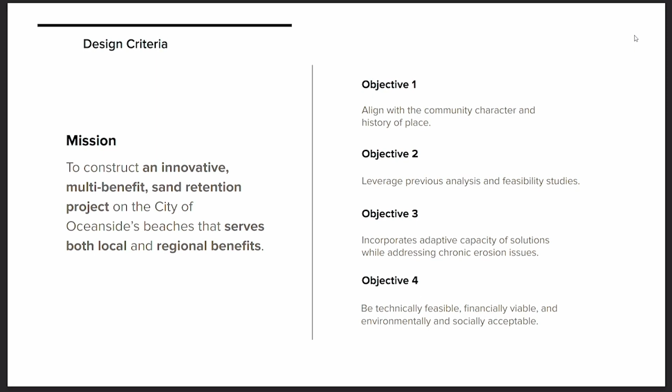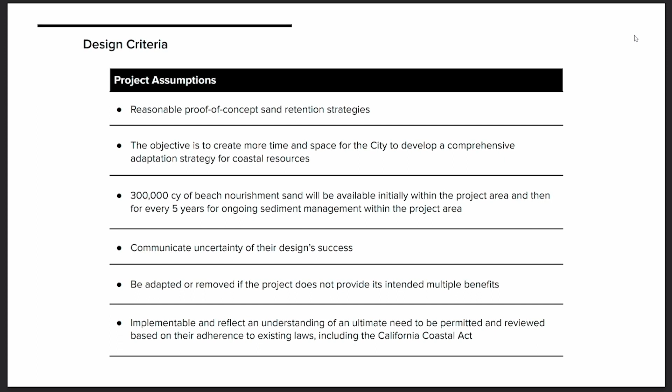Our criteria are all published online as well, so if I'm referencing it here quickly, we'll publish these slides and also have the design brief published with all of this information. It's based around physical, financial, environmental, social, and regional goals. We also have a set of key project assumptions, like how much sediment we're imagining would nourish the types of projects we're seeing today, and uncertainty in design success, et cetera. All of the teams presenting will speak to different performance goals, costing, as well as share with you what their concept might bring to this community.

So that's kind of where we're headed, and we have a couple minutes to go. What we wanted to do is set up—today our first team is Deltares and MVRDV. We're so fortunate to have them joining us from the Netherlands, and they're going to share with you today an update to their concept. They'll have about 20 minutes to present. So as you're listening, again, you can be writing questions—you can submit your questions online.

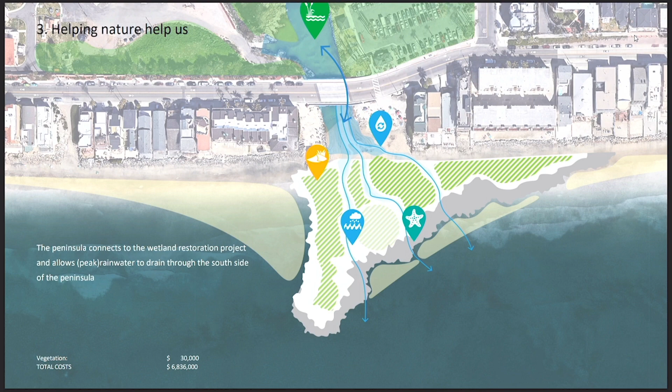As we move on, after this initial stage, a fill of sand will take place, 200,000 cubic yards half a mile north of the peninsula, and 100,000 cubic yards half a mile south. This type of sand fill is needed to create enough sand volume in order to have a base for our beach. The peninsula connects to the backshore wetland and becomes an extension of it, with a creek mouth opening towards the ocean. A vegetation layer will be added on top of the core of the peninsula, and that will raise the cost by about $30,000.

Functionally, how the peninsula works, it slows down the mobility of the sand from north to south and from south to north, retaining and nourishing the beach south and north of the peninsula without obstructing overall movement of sand. That creates a new beach with a width ranging from 100 feet at the widest part to 50 feet at the narrowest part.

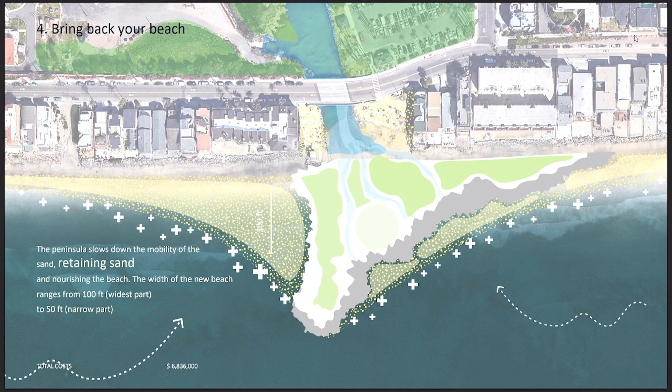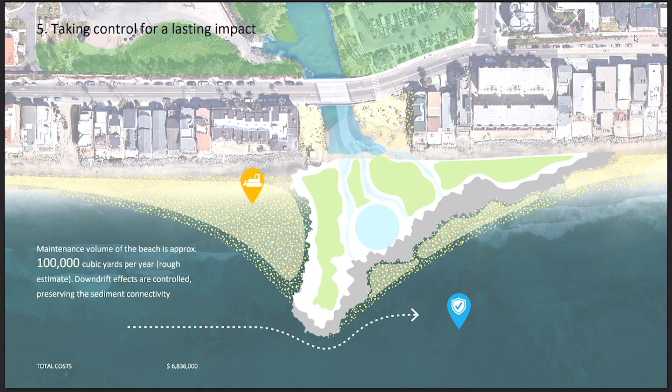For a lasting impact of this beach and the measure, there is the need for nourishment. Approximately, we will need 100,000 cubic yards per year. This is kind of a rough estimate, and the exact amount of infill needed should be studied further in the future. The downdrift effects are controlled, and the sediment connectivity is preserved with this peninsula.

The peninsula is publicly accessible, makes the sandy beach publicly accessible for bathing and the surfing point, assists the watershed through flood control enhancement, and creates an area of nature exploration.

In this stage of constructing the peninsula, we are adding another layer of activities, for example, a tidal pool, a set of elevated pathways, and other public amenities that will raise the cost for the creation of this peninsula to $8.5 million. We're also adding a boardwalk connecting the north and south of Oceanside.

And on the next phase, we see how we create these different habitats. So by making this extension of the wetlands, we create in total 5 new habitats. We have the sandy beach, of course, the sandy dune habitat, the coastal wetland, the intertidal habitat, and the subtidal habitat.

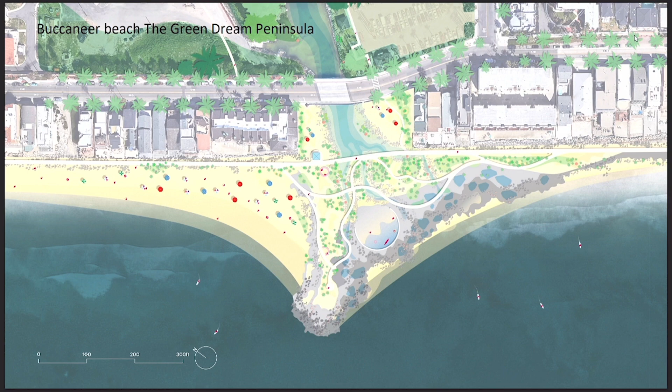So here you see a plan view of our proposal. You see how our proposal is connecting with the Buccaneer Wetland Restoration Project and becomes a place with the community. We create a wide, safe, and sandy beach. We create intertidal wetland. We have the tidal pool.

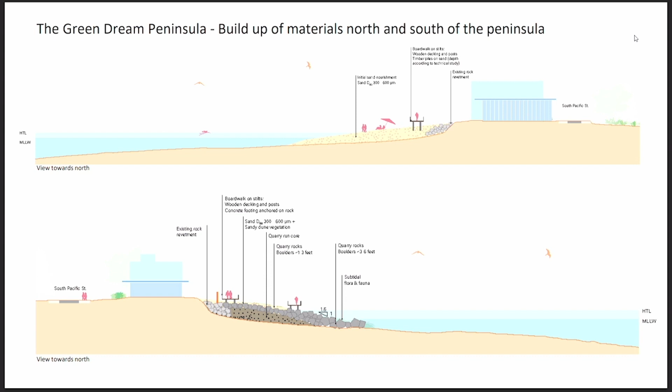How the structure is made. The structure is quite straightforward, let's say. Here in these sections, we have a core of bigger and smaller quarry rocks and boulders with a spine of quarry run on top that helps to grip the sand and restore the new beach.

This is a view of one of the elevated pathways towards the pier. We have enough space on the beach, we have an entrance, and we make sure that the surfing conditions are preserved on this side.

As a next step, we wanted to take a better look at the environmental feasibility and what type of habitats we can imagine here. In order to do that, we have consultation with local experts. We have a project team with specialists on species and what type of habitats we want to create. And that's how we created the 5 different habitats that I mentioned earlier.

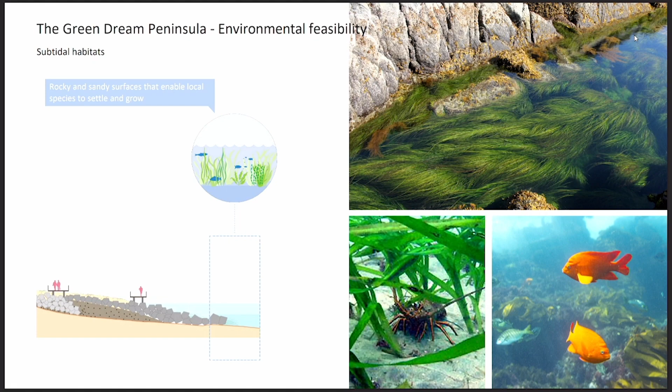And I'm going to take you a bit through how we imagine this and how this could be realized in Buccaneer Peninsula. The first one is the subtidal habitat. It's really at the edge and it's mostly underwater, as the name says, and it's mostly rocky and sandy surfaces that can enable local species to settle and grow, like, for example, the surf grass that we see here. This is very important because biodiversity loss can be reversed through this type of project with habitat restoration.

The next habitat, as we go more towards the land, is the intertidal habitat. It's a rocky habitat that enables preservation of species, and it has been seen in the context of Southern California a lot, like you see here, an example from the La Jolla intertidal habitat. And also here we see that it can create opportunity for these tidal pools, like the example of Laguna Beach, and we can imagine it being here on our site, open for more human activities.

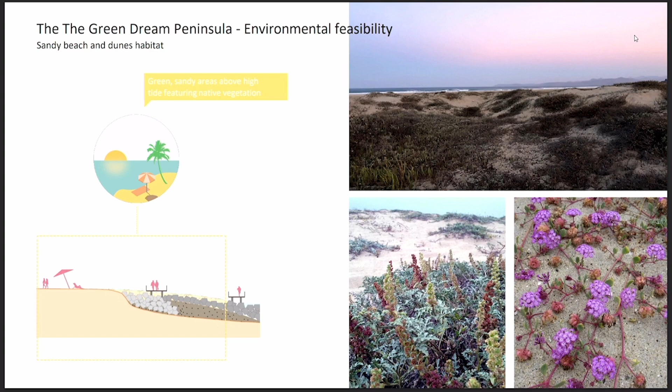Then we have the sandy beach and dune habitat, which is also part of the more inward part of the peninsula, and we can have species like coastal sage scrub on that. Dunes in general are a nature-based solution to enhance resilience, and they can be part of the new beach of Oceanside.

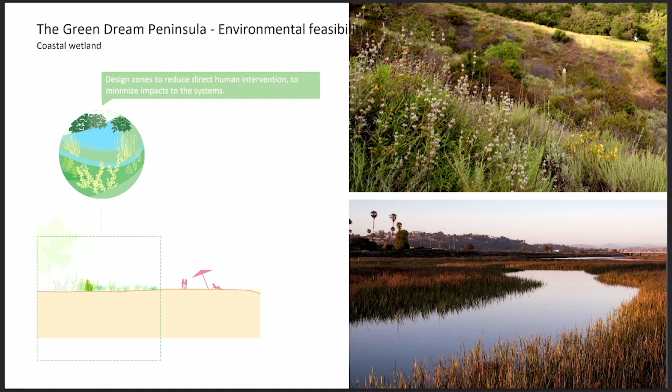The last habitat is the coastal wetland. It's a zone designed to reduce direct human intervention and to minimize the effects that human intervention can have on the system. Wetland restoration can help with extreme climate events, so it can help with flooding, and it can ensure that the beach will stay there for a longer period of time.

Overall, that's the design of the Sandcatcher. It's a collection of multiple benefits. And the Green Dream Peninsula is a dynamic space that creates a new beach that benefits community and nature. Now Volker will explain the future possibilities.

Thank you. Yeah, so welcome again to the future of Oceanside. While the future of the Rebeach, as we just explained, is actually very near, let's open up another window of opportunities. Well, Oceanside is one of the pearls of the Californian coastline, and each pearl has its own identity.

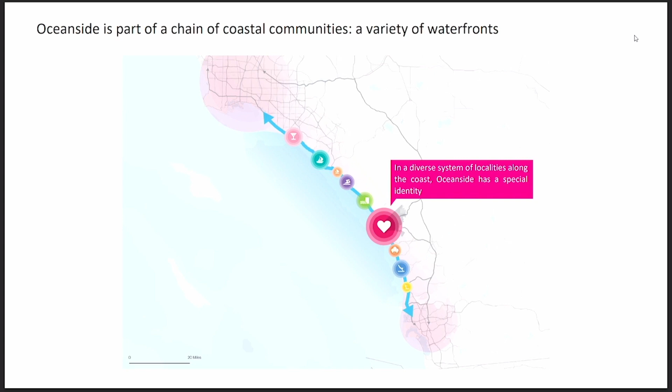So how to add to that variety and how to stand out and really make a difference, make people want to go to Oceanside. And even within Oceanside, we see a chain of diversities, a chain with new destinations by adding program in addition to the pier that's of course already here.

And restoring the connection over the full stretch of the coastline along the way, making a unity of Oceanside again, making the sea accessible again.

And although it's not a must, we proposed a pilot project to be at the Buccaneer Street. It seems the most in need, not having any beach anymore for so many years.

So as we studied before, we can also imagine another peninsula at the Wisconsin Street. And even more can start, as you see the dashed line. They can start growing and lining up between the pier and the lagoon.

With a minimum maintenance and a high level of adjustment, either smaller or larger, it's easy to copy, it's easy to phase over time. And within the current budget, we actually find that all these interventions can either start over time or maybe even at the same time.

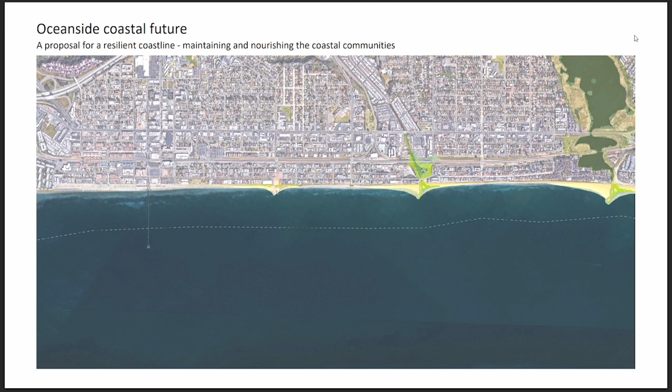All 3 peninsulas can be realized at low cost intervention. And we can see each new leisure paradise growing from there. Each with their own identity and each with their characteristic features, some planned, some unforeseen.

So, but before starting to transform the entire coastline of California, maybe we just start very small and where it's needed most, as said, the Buccaneer Street.

But why call it a green dream, as we say? Well, the peninsula part, I think, is pretty obvious by now. But the green dream, why? For one, because it's not only green, it's actually also very blue and, of course, mostly sandy.

And more important, it's really not a dream. It's something that we can really get very soon. It's plain simple. It's a proven method, and it's within budget.

And we do small interventions with the least impact on the current situation, with a large impact on nature and sea life, with the least effect on the waves, the iconic waves, of course. And it simply retains the sand for you.

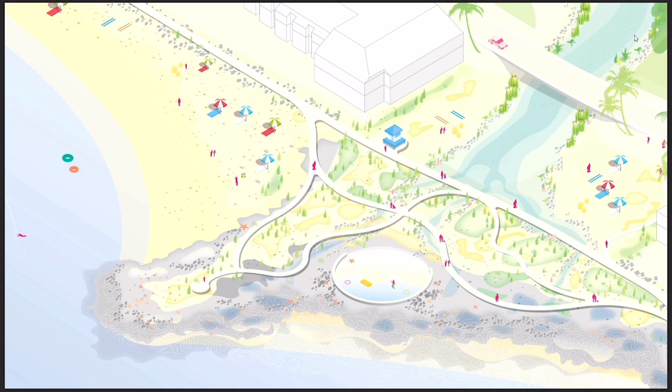It has one more on nature focused, the other one more on leisure, but they will all have sand. Nice sandy beaches as you knew them before.

So this is our proposal. The real work really only starts now. And we can't wait to start creating the future of Oceanside here with you and for you. Thank you very much.

I know you guys are probably more than familiar with what's going on here already, but just to reiterate, there's a couple of existing problems here. We're really trying to get access to safe and usable beaches, and there's two scenarios happening here at Oceanside. One where there's literally no beach, which is not good for access and is not safe. But then there's also the other, which is a limited accessible beach with the cobble.

Here's an image of the famous cobble wobble, which I thought was quite a cute little term. But actually having cobble on the beach can also disrupt the downdrift impacts too. If the sand is moving all the way down the beach and you've got cobble, there's no sand to move downdrift, so the downdrift beach can actually get a double whammy. So we want to get back that sandy beach, which is also good for people and for the Grunion.

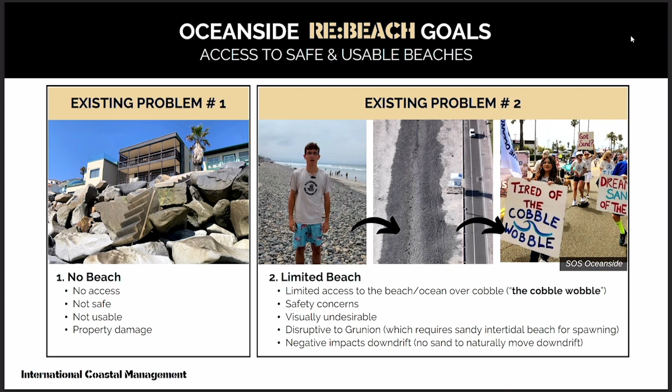So what is a healthy beach profile? You get these two bumps, one bump at the top of the beach and another bump at the bottom of the beach. The top bump is the sand dune and the bottom bump is a sandbar. So what we really want to do is recreate the sand dune and the sandbar, but then we also need to retain and manage those for an extended period of time, and that's when you get your real re-beach benefit.

Around the 70s, something started to change. The conditions changed, both man-made influences and natural conditions changing. And we were actually left with this long rock wall sort of step. The Gold Coast is 20 miles long, so we had basically the road level down to this rocky step down to the beach.

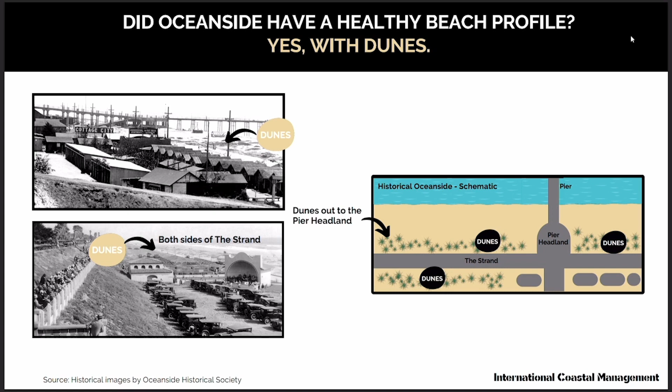So here's a schematic. You can see there was actually dunes on both sides of the strand, right up into this little pier headland, sort of abutment under the pier back in the day.

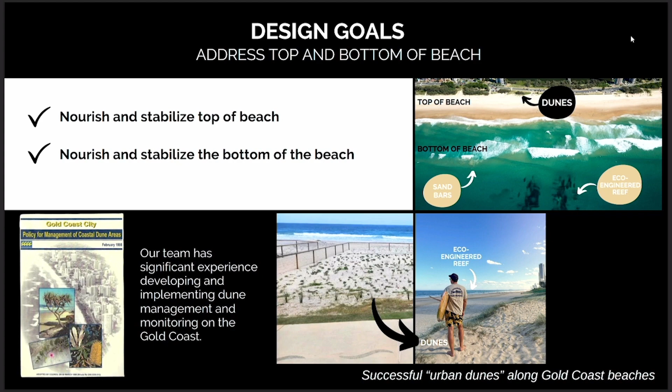So yes, the sand dunes - basically our founder Angus Jackson also wrote the book on dune management for the Gold Coast in Australia, which is still implemented today. So yeah, it's not just me up here talking, even though you guys have probably seen me a few times and you might be getting sick of me.

But there's actually a whole team behind us in Australia. We have our founder, Angus Jackson, who actually had a similar role to Jamie here at Oceanside about 40 years ago on the Gold Coast, and he was the one that implemented these pilot projects. He came to Oceanside in 1983 and talked to the US Army Corps of Engineers, looking at the bypassing tests that were going on - the pilot projects for the bypassing system - and took that back to Australia. We implemented the bypassing system on the Gold Coast, which has been running successfully now for the last few decades.

And we actually implemented two. So apart from that, after 40 years we're basically bringing this sort of technology and information back to you guys to keep the momentum going.

We also have Bobby Corbett - she won an Engineers Australia Award for Women in Coastal Engineering and Geoscience this year for her work on artificial reefs. We've got Sam King, who's actually joined me, sitting down the front. He won an Engineers Australia Award for his nature-based solutions project in Australia. He's going to be featured in this upcoming US Army Corps of Engineers Engineering with Nature book that's going to be published this year.

And then we also have Roger Tomlinson, who's the head of Griffith University's Coastal Management Program, and some great world leaders in the field on this team. Darryl Strauss, Dr. Darryl Strauss, one of the best coastal modelers in the world. And we also have Dr. Rod Connolly, a foremost marine biologist. So we've got quite the Rebeach team here behind us.

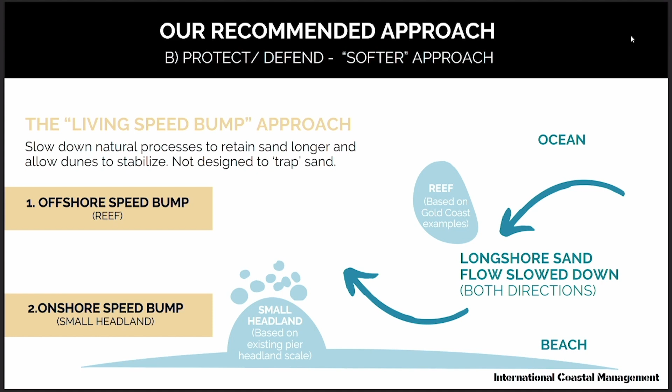We want to do a bit of a softer approach, so we're looking at doing a smaller structure and a submerged reef. We want to slow down the sand movement, and we want to slow down that wave energy, not stop it offshore. That results in this kind of wonky looking thing that we're calling a living speed bump. Again, the whole idea is not to stop the natural process, it's really just to slow everything down. So we're still allowing for that longshore sand transport to move, but it's just slowing that process down with an onshore speed bump and an offshore speed bump.

So what does that actually look like? Here's just an example of what the onshore speed bump could look like. We've got a bit of a headland with a low permeable end on it. So how do we come up with this?

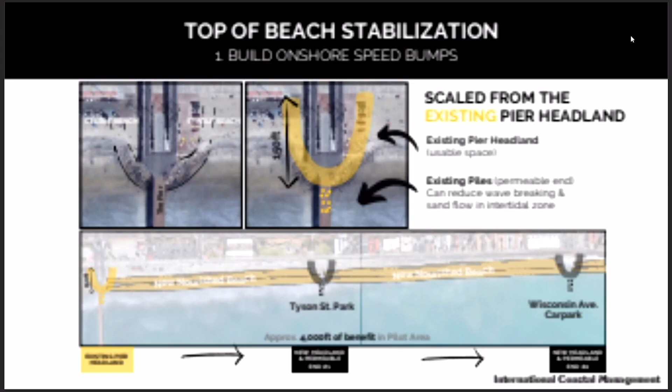Sometimes the best place to look is right on your own doorstep. So we looked at what's already here at Oceanside, what's kind of working. One of the things we noticed is under the pier there's a little headland sort of abutment, about 150 feet long. The jetty off the end adds this extra permeable section, and this 150 foot little headland is actually working pretty well to stabilize the top of the beach.

So what we wanted to do is basically recreate that, one up at Tyson Street Park, one at Wisconsin Avenue, just to stabilize that top of the beach. We're looking at about a 4,000 foot benefit area in this pilot zone.

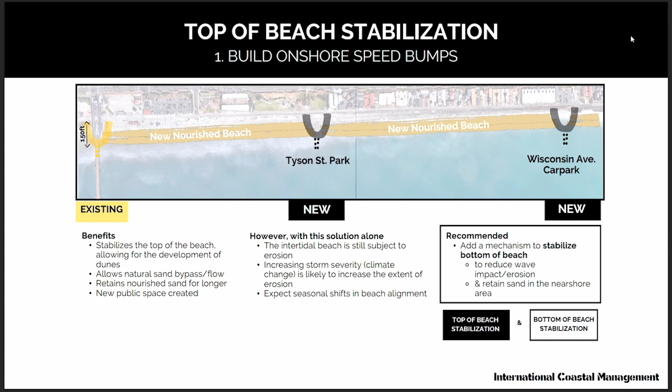Is stabilizing the top of the beach enough? We don't think so, going into increased climate change and storm severity. So we want to also stabilize the bottom of the beach. We know stabilizing the top is going to be beneficial just to get that dune stabilization and allow the dunes to grow, so we're actually going to add some bottom of the beach stabilization.

So what is that going to look like? There are two things: one is nearshore nourishment, which is essentially placing sand into the nearshore area, and then an eco-engineered reef. The nearshore nourishment and the eco-engineered reef work hand in hand to stabilize that bottom of the beach.

Nearshore nourishment is also a process that was developed on the Gold Coast. It's a really efficient and cost-effective way of putting sand back onto the profile to nourish the whole profile. Whenever you want to do a nourishment project and widen the beach, you can't just put sand on top - you need to widen that whole beach profile. That's where nearshore nourishment comes into place.

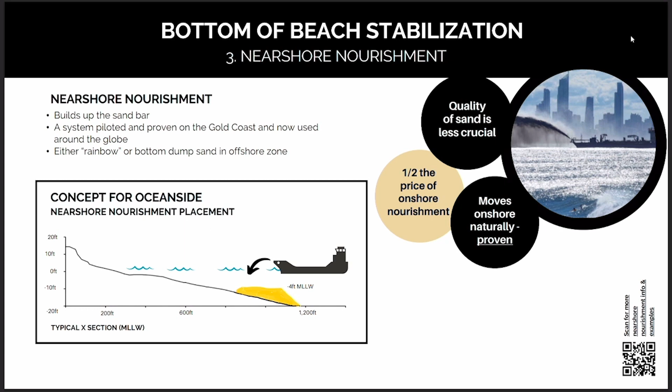It can either be done via rainbow, where you spray it out, or you can drive over and dump it at the bottom. This is a shot from the Gold Coast of placing nearshore nourishment in the surf zone, and it's really quite effective. Then in conjunction with the nearshore nourishment, we're looking at an eco-engineered reef.

We've done two considerations here for Oceanside based on the two reefs working on the Gold Coast. We have a sand-filled geocontainer reef, which is lower and wider, or a rock reef, which is smaller and higher. Both have their own positives and negatives, looking at safety, cost, constructability, longevity, removability, and environmental benefits.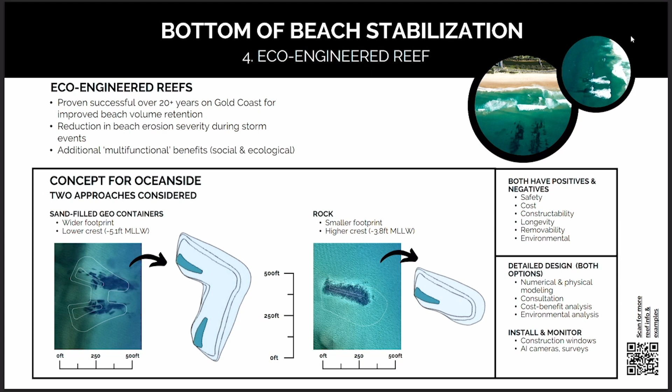Based on conversations from the first couple of Rebeach programs, we're using the footprint of the sand-filled geocontainers, because it's also a cost-effective way to do this in a pilot setting. If we go ahead with detailed design, we'd consider both and run them in parallel. In detailed design you do further numerical modeling, but also physical modeling, running waves in wave tanks over both. But based on our initial concept modeling, either footprint is going to work for Oceanside.

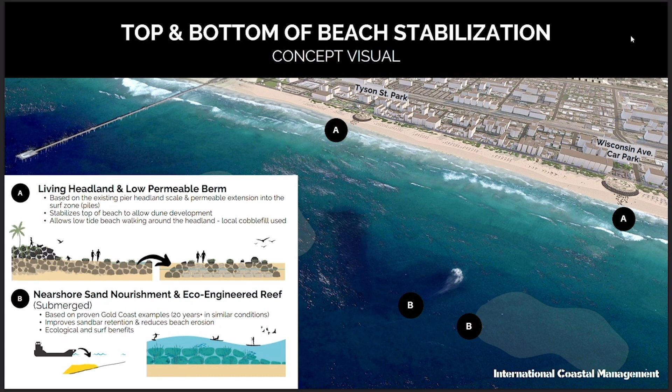When you put them all together, you get this top of the beach speed bump, which is the two headlands. Note that those little headlands are roughly the same scale as the one under the jetty pier. Then you've got an offshore reef and additional sand nourishment in that nearshore zone.

What are we really talking about here? Short headlands that come out onto the beach, some low permeable rocks into the surf zone, and submerged reefs - all of which already exist here in Southern California. We're just putting those together.

This is the concept, one of the concept locations here at Wisconsin Avenue Car Park. You get an idea of before and after - a nice, wide, sandy beach, a bit of dune up top, usable headland space. We didn't want to put too much on it at this point, just at a concept level - some dune vegetation, maybe a shower, maybe a bathroom, some designated dog areas, a playground, and you get this kind of usable space.

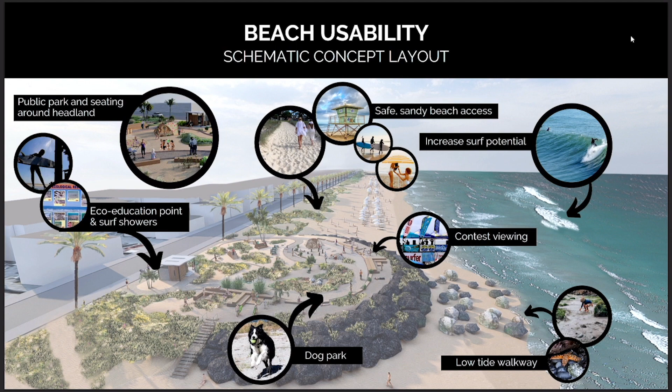Note again, the size of this headland is already what's existing under the pier. So you get this nice wide sandy beach, access points between the dunes, great for surf contest viewing up on the headland itself, and this nice intertidal walkway around - so you should be able to walk all the way along the beach at low tide.

And this is just to reiterate the sort of usability and the space. It's really going to be comparative to the headland that's under the pier as far as scale.

What we noticed being here on the beach and looking at historical imagery is that most people access from the road and go straight to this sort of umbrella zone. And there's this almost unused space at the top of the beach.

So what we're saying is turn this unused top-of-beach space into something green, while still keeping the access way to it so you can still go to your umbrella zone. The umbrella zone stays the same, your swimming area stays the same. But the added surf benefit is going to increase, and you're also going to get an offshore habitat as well.

Just reiterating that point again: you've got that nice dual space up on the top of the beach and on the headland itself, an intertidal habitat down in that permeable headland end, and the reef can really encourage some biodiversity as well. This is just an example coming off the Australian reef.

These large sand-filled containers are about 200 tons each. The type of material on the end and outside is kind of like Velcro for microbes floating around in the water, and they stick to it within a matter of hours, really attracting seaweed, kelp, and even soft corals, which you can see up on top.

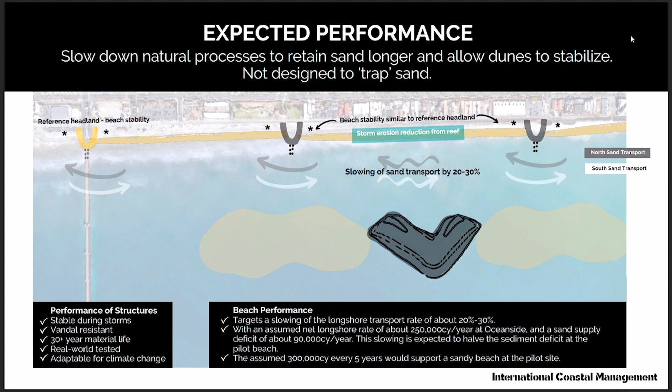This whole re-beach approach is about innovation, and we love to be innovative, but we also want to be risk-averse at the same time. So what are we doing about that?

We're basically leveraging the size and scale of something that's already working on site with this little headland speed bump, roughly the same scale. So we know that's going to hold the top of the beach. We know that the engineered reef off the bottom of the beach is going to stabilize the bottom of the beach. So you're getting top-of-beach and bottom-of-beach stabilization, and we know that's going to work.

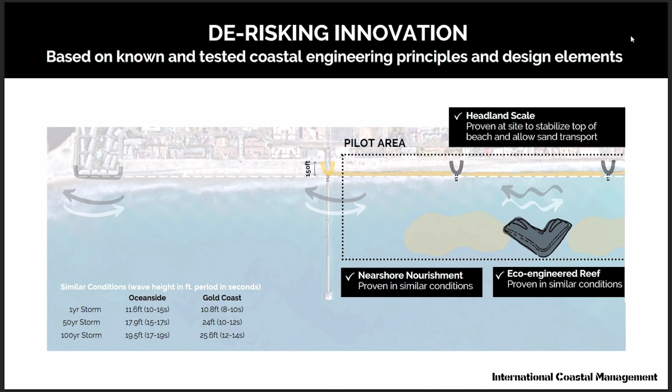And how much is this all going to cost? We're looking at around $31 million to get this 4,000 feet worth of beachfront. When you break down the costs, it's really an even split between the amount of sand that you put in, the headland, and the reef itself.

So as you scale this up down the beach, it would actually get cheaper as you went down, because you would only need one extra headland for every reef that you do. So you could actually do the whole of Oceanside for about $130 million, and that would give you a nice, stable beach, protected from storm erosion as well.

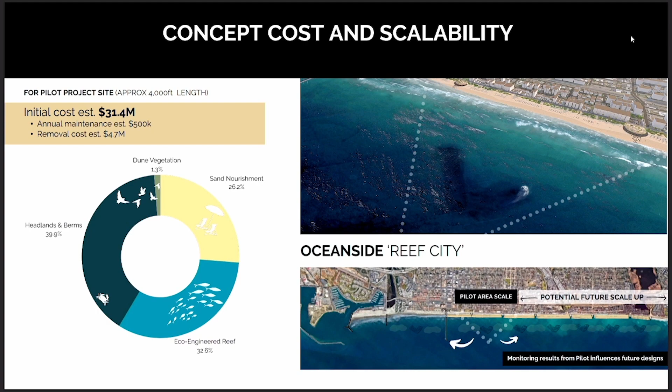So what are we really saying here? The living speed bump approach is really just leveraging this sort of resilient development that's been happening back in Australia over the last few decades. And we just want to build on that and bring that to Oceanside because we know it works and we know it'll work here, for a greener and sandier Oceanside into the future.

But it's also more than the design. We can put this concept in and we know it'll work, but we're also bringing those last four decades of monitoring and management and the technologies and materials that go along with this kind of re-beach project. So implementing the actual monitoring and knowing what to look for and what the process is going to be so that we can feed back and get this thing going, and bringing the dune management and sand management processes so that this can really get longevity.

And that kind of wraps it up. So I hope that helped to get our message across, and we really look forward to working with you guys and implementing something like this into the future.

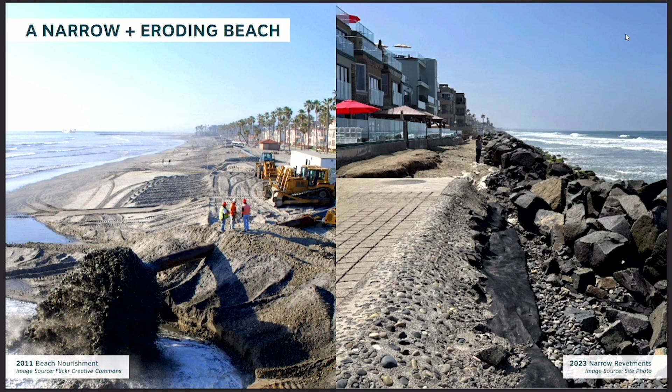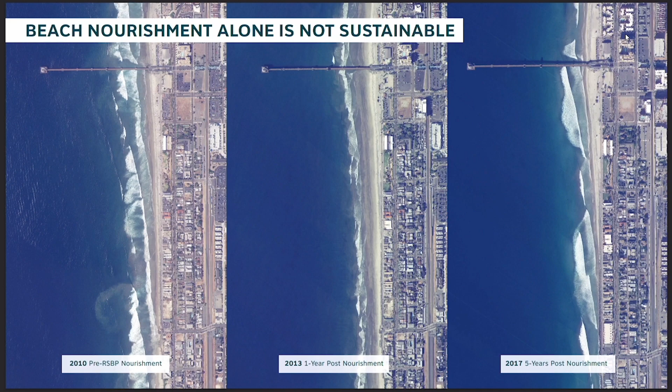Anyways. But that space, that place, and all the activities that happen on it are at risk. We know that sand erosion and accretion is a natural coastal process, but in recent years the erosion, the loss, has exceeded the gain, and we are losing the space to foster those activities and the beach itself. The beach has been sustained through ongoing beach nourishment, but we know that nourishment alone is not sustainable for the long term. And that is why we are here today.

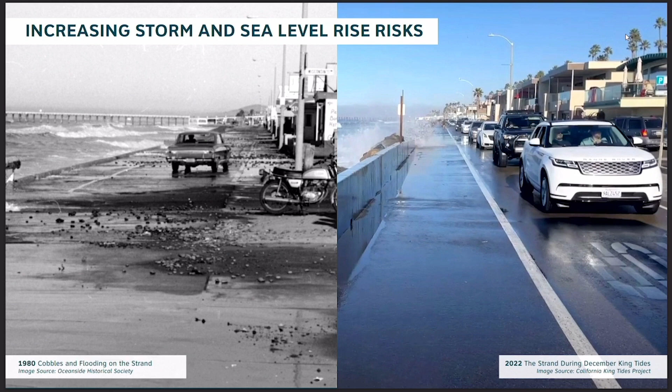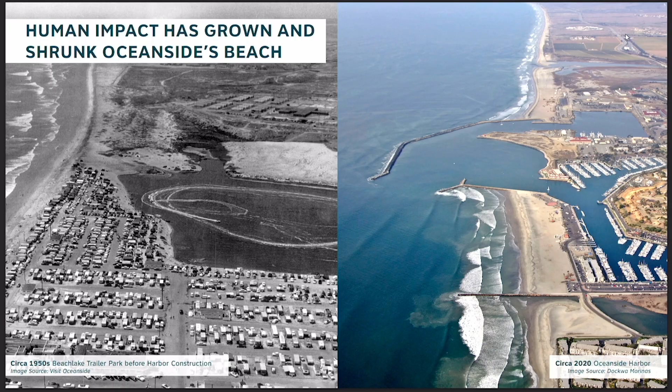We also know that the beach itself and the strand behind it are threatened by incoming threats such as sea level rise and increasing coastal storms. But building beach has been a part of Oceanside's history for a long time. The beach is not necessarily natural. It has been shaped by human hands through the placement of dredged sand on shore, but also through actions that have interrupted sand movement and increased erosion. But we believe that building beach is part of your future as well, but that will mean living with a changing beach.

And that by combining and layering nature-based strategies that are both inspired by and modeled on the natural shorelines and shoreline processes that we see on the Southern California coastline, that we can expand and sustain a sandy beach, reduce risk, and support the waterfront activities that you cherish on Oceanside's shores.

Throughout this design process, we've received many questions, input, and feedback from you, and thank you. Your input has made our project much better than it could have been if designed alone and in isolation. And we hope that you see your input reflected in what we discuss and present today.

Your input has guided the goals of the project that are listed here, but in short, our goal is to deliver you a pilot that tests nature-based features using materials native to the Southern California coast that restore and retain sand, and that is implementable, adaptable, and potentially replicable to multiple locations in Oceanside. And that is the pilot we're here to present today.

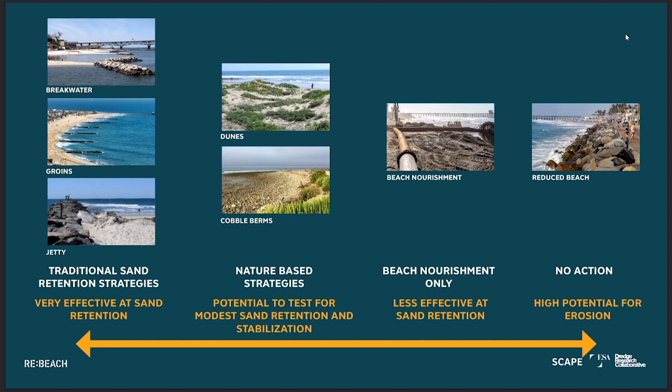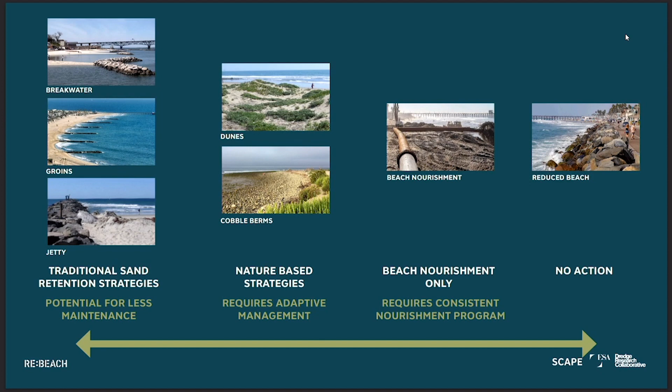We look to strike a middle ground between traditional hard sand retention strategies and the currently long-term unsustainable practice of beach nourishment alone. These strategies are designed to retain sand and encourage modest localized sand accretion as an alternative to those harder strategies that stop sand movement. This will require ongoing monitoring, maintenance, and adaptive management that is a critical part of any successful proposal.

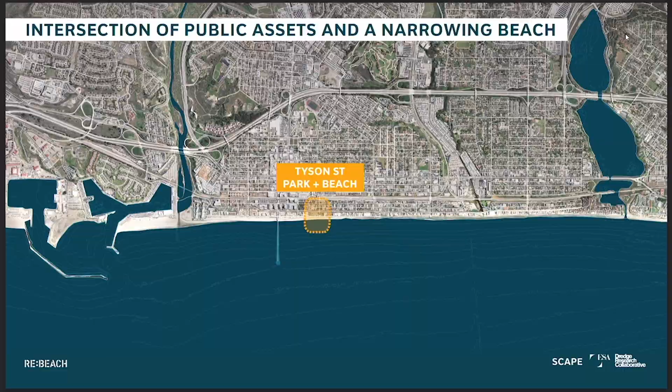And so we're here to present our pilot, which will happen at Tyson Street Park. This place has been selected not only because it is a place where we are really losing beach, but it's also a site that has a cobble berm foundation, and it's also a public space. It's a public asset, a public infrastructure, and publicly owned, and a site where we have the foundation to do a realistic, affordable, and implementable pilot. So to discuss that pilot and its processes, I'm going to turn it over to my colleagues.

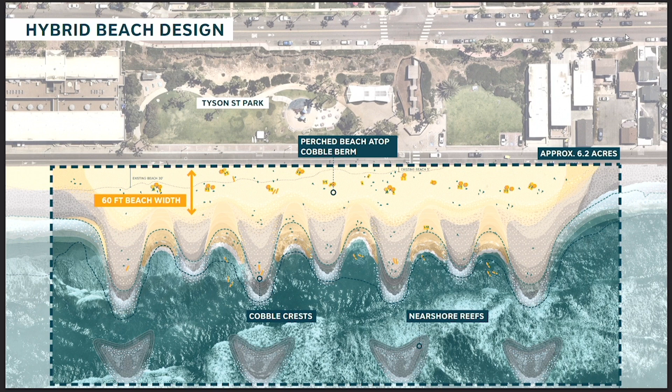So to create an expanded dry sandy beach here, our team has developed a hybrid beach design where a sandy beach perched atop a cobble berm extends seaward of the Strand to create around 60 feet of new beach. This perched beach is supported by cobble crests and nearshore reefs that work together to promote potential sand accretion. And expanding the hybrid beach is Dune Park, and Dune Park re-envisions Tyson Street Park with new amenities and coastal landscapes.

By shifting the Strand towards the bluff, we make space for dunes. And the dunes in the new park create potential sand feeders for the beach, restore a native Southern California landscape, and extend the dry sandy beach area. Together, the hybrid beach and Dune Park components create between 60 to 100 feet of dry sandy beach, native dune habitats, and new park amenities while preserving critical existing park elements.

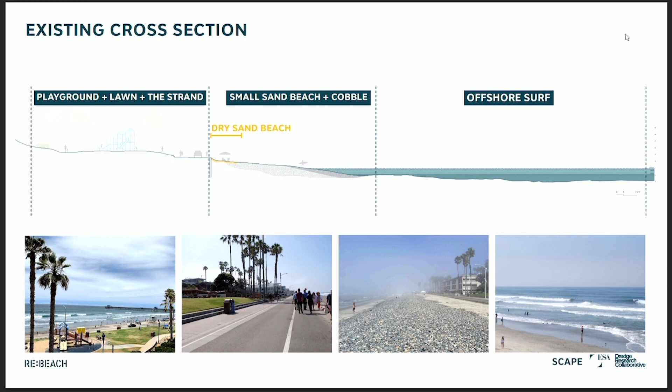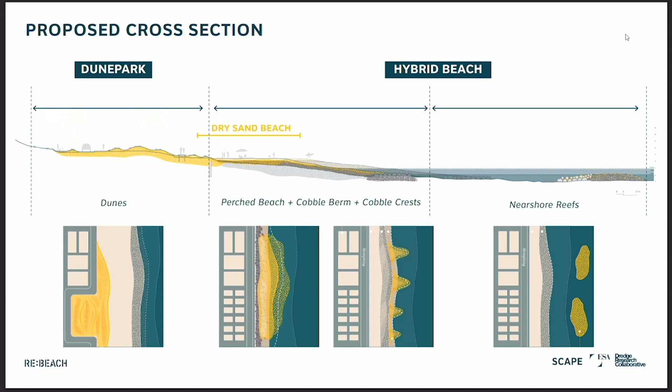So how does this all work? To start, here are the existing conditions of the site, where the back of the site is higher in elevation. At the Strand, a small stretch of sand beach exists with an exposed cobble berm sloping down to the water. Our team proposes to reconfigure this section by shifting the Strand up and inland and layering nature-based strategies from the dunes to the beach to the cobble crests to the nearshore reefs, which will work together to build a resilient shoreline. So let's go deeper into the hybrid beach.

In this seaward portion of the design, we focus on the establishment and stabilization of a dry sandy beach. The perched beach is built upon a cobble berm comprised of existing and new cobble material. Cobble crests are the undulating formations you see here along the shore. They extend from the perched beach into the water. These crests reduce the erosive forces of waves and create opportunities for potential sand accretion in the pockets between them.

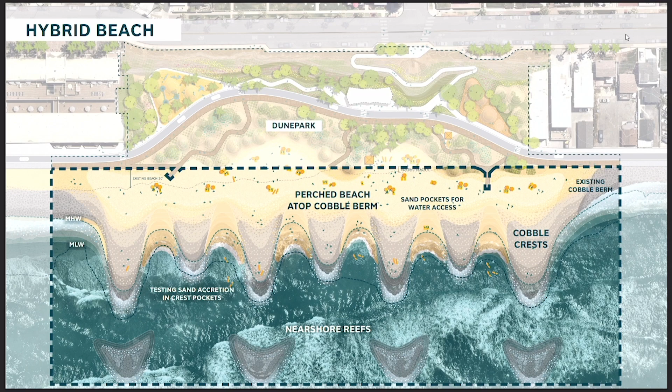We also propose placing sand within the pockets to provide comfortable sandy access to the water's edge, at least during the summer. The nearshore reefs will break waves as they approach the beach and have the potential to help accrete additional sand. For reference, we looked at historical imagery of Oceanside's beach to provide inspiration for our designs.

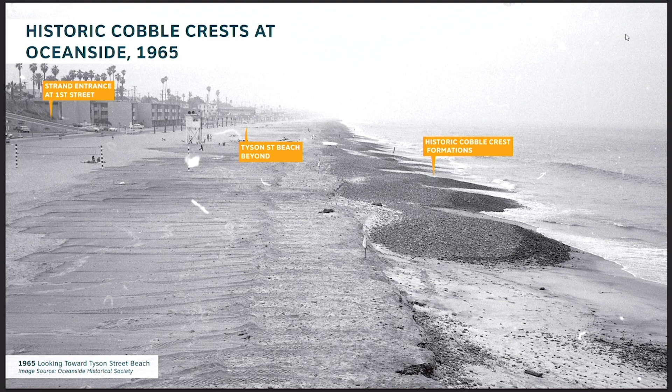can enhance natural processes. So going back to Tyson Street Beach, we want to build upon the cobble material that's already there. And today we could see about 5 to 30 feet maximum of sandy beach, but by implementing the hybrid beach, we have the potential to expand this sandy beach width to between 60 and 100 feet.

By elevating and extending the existing cobble berm and placing sand on top of it, we create a perched beach condition. With the sandy beach sited higher and lifted away from regular wave action, we can reduce erosion and prolong the lifespan of sandy recreational spaces like this, essential to the Oceanside community. You can also see here the proposed sand pockets that slope down into the water to provide more comfortable access to the ocean.

Looking at this section, you can see the design parameters that we've used for slopes, widths, and heights of these proposed features. These are the proposed constructed conditions, and as a dynamic coastal landscape, they will shift and change with the seasons. In this section, you can also see the various materials that we're proposing. To start, we are building upon the existing cobble berm. The yellow and black speckled area is additional cobble material placed on site, and the yellow is a sand layer placed on top of the cobble.

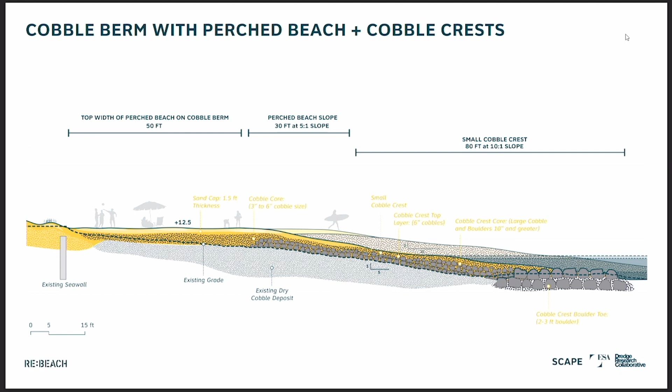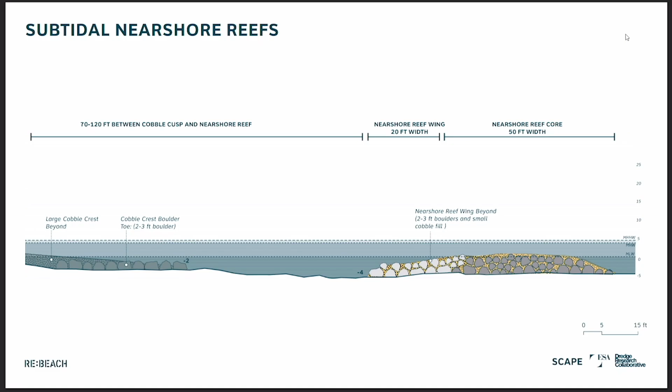The most seaward component of the hybrid beach design are the nearshore reefs, which are offshore structures inspired by Southern California reefs. We know that these reefs are typically large and connected to bedrock formation, but here we are building rock structures that mimic those natural reefs' ability to dissipate wave energy and encourage sand retention. And so in section, you can see how the proposed nearshore reefs combine cobble and larger boulder material. They are fully submerged under the mean low water line. And this is meant to work with our cobble crests to test the sand retention and accretion potential of these combined features. And so now we'll walk through the Dune Park design.

In Dune Park, dunes are designed to adapt over time and shift with changing winds, waves, and storm events. Native dune vegetation will be planted atop the dunes, and walking paths winding through the landscape will orient users to an expanded sandy beach at the water's edge. By relocating the Strand inland, this critical infrastructure is elevated and less exposed to flooding and waves, buffered by the restored dunes and expanded beach.

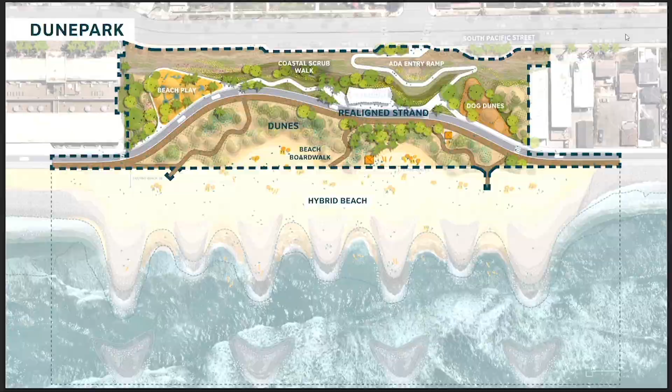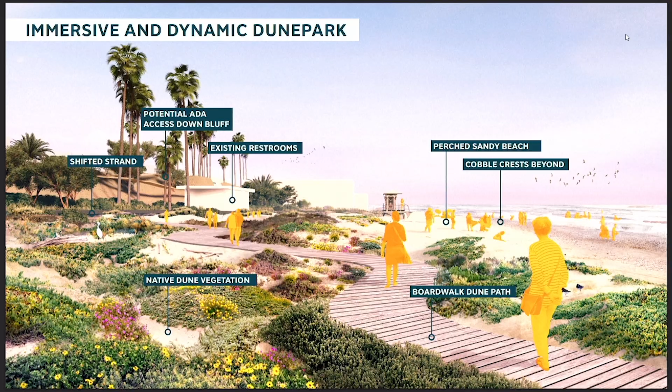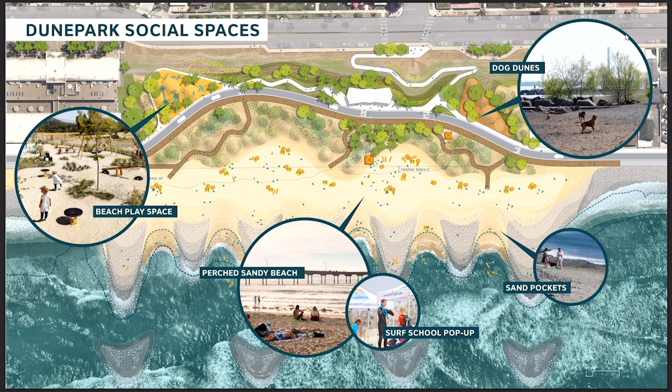But this space is also a social park space for recreation, including programs like a beach play space, a designated dog park, in addition to preserving existing beach amenities like the restroom. Dune Park also further expands the sandy perched beach to provide more space for people to recreate. So back towards the bluff, Dune Park includes community amenities that embrace the look and feel of Southern California. The beach play area seen here is nestled behind the realigned Strand and looks out across the dunes to the water.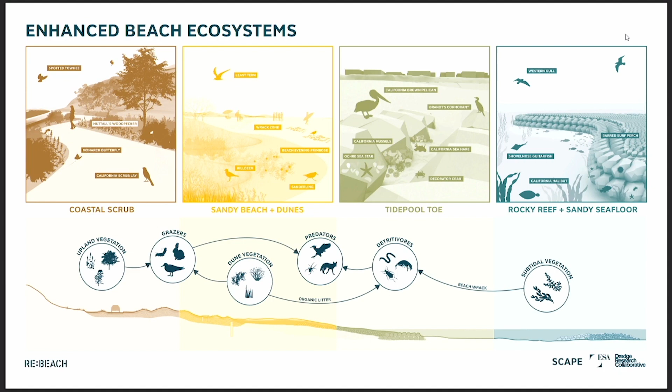So this project is for people, but it's also for the birds, mammals, and aquatic creatures that share the oceanside shoreline. Here you can see how Hybrid Beach and Dune Park create a range of habitats that support healthy coastal ecosystems. Hybrid Beach and Dune Park work together as a proposal to positively transform Oceanside's waterfront. Not only does the pilot create a perched beach that could sustain the uses and activities you enjoy today, it also creates exciting opportunities for social and ecological advances in the future.

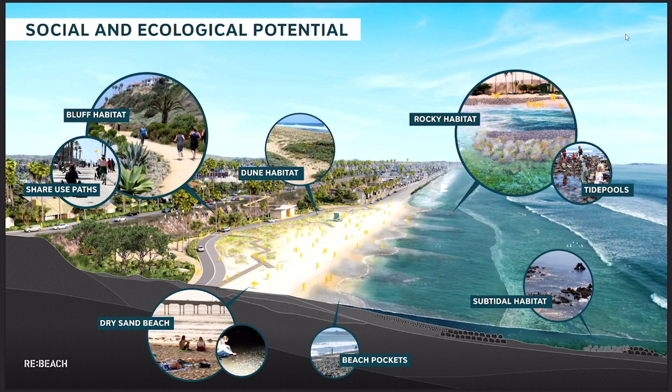Thanks, Jenna. I'm going to take the next few slides to describe how our proposed pilot will be designed to perform over time. To reiterate our design purpose, the pilot will establish a dry beach area on top of an expanded cobble berm, provide a landward dune beach transition space for the beach to migrate and be more resilient to storm impacts, and also include cobble crests and nearshore reefs to further support and protect the perched beach and facilitate sand retention and accretion throughout the project reach.

These reefs are conceptually designed to dissipate waves for the purpose of sediment retention. During the engineering design phase, these reefs could be refined by engaging with the local surf community and additional engineering analysis in order to improve the potential surfing benefits provided by these nearshore reefs.

Monitoring and adaptive management are an important part of this project concept, and we're aware of several ongoing efforts to track shoreline change in Oceanside. In fact, this pilot can engage with the ongoing efforts, including SOS and Scripps Beach Transects, as well as the Scripps Cobble Tracking Project.

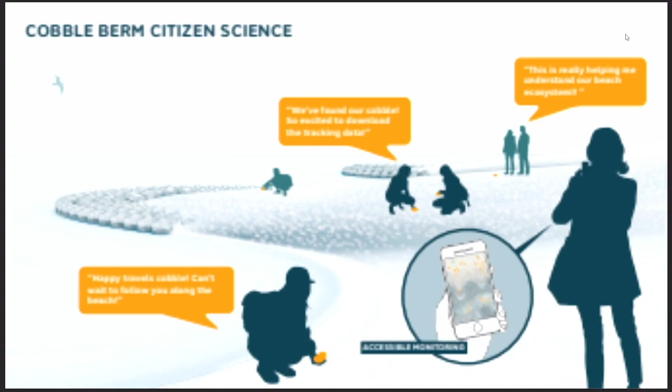The pilot provides opportunities for academic research and community education and engagement on coastal sciences and adaptation. For example, an interactive monitoring program could be developed with Scripps and others to create access for the public to engage and track the project over time, introduce a cobble tracking platform, and even potentially a program such as Adopt a Cobble for the kids to get involved and learn more about coastal science. Again, this monitoring program is not developed, so it would be coordinated with these other ongoing efforts within the community and the region.

For the next few slides, I'm going to do a bit of time traveling to explore how our dynamic concept will function over time. To start, post-construction, we'll have the conditions depicted here. This is a slice of part of the project concept. Again, to reiterate, we have a realigned strand that supports a wider dune beach transition, perched dry beach on the cobble berm, and crests extending into the water, creating undulating pockets, providing sand access opportunities to the water.

Again, the nearshore reefs will be located offshore of the crests and work to dissipate waves and increase sediment accretion potential. During typical summer conditions, the cobble crests and nearshore reefs are designed to be relatively stable, and summer's a typical season of accretion. So the sandy pockets between the crests will persist, and the crests and reefs have the potential to retain sediment lower in the pocket and in the area between the crests and reefs. I wanted to reiterate that our concept is designed to facilitate localized accretion of sand while not impeding the overall longshore sediment transport through Oceanside's shore.

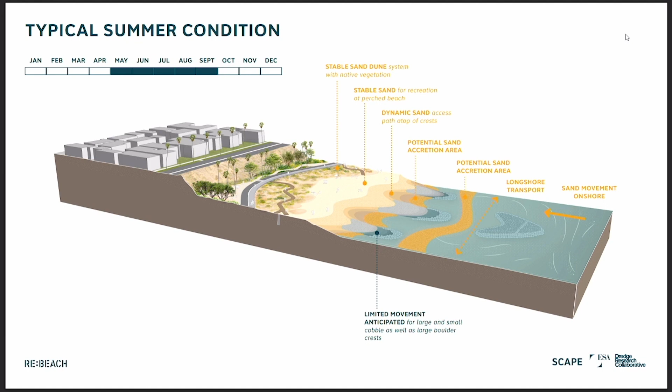Shifting to the winter, which is more characteristically stormy, we expect the stormier winter conditions to erode sand from the crests and from the pockets, exposing the cobble material and also creating a scarp at the transition from exposed cobble to the remaining perched dry beach. I'll say that the majority of the dry beach would be preserved throughout the typical winter based on its design elevation. That's the purpose of our elevated cobble berm.

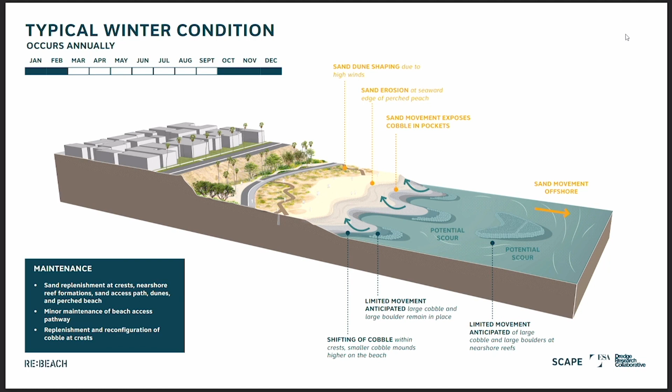During typical winters, crest and reef cobble material may shift slightly, but overall hold their shape with the support of the larger rock that defines their overall geometry. Typical maintenance after regular or average winters could include minor reshaping of the cobble crests and berms, importing cobble as needed to replace material that's been displaced. But primarily the annual maintenance would be replenishing sand on that seaward face of the berm, on the crests, and into the pockets to restore that sandy path of access from the upper dry beach into the water.

Considering a more extreme storm, a characteristic storm we consider a 20-year recurrence interval or greater—so a storm that might typically occur once every 20 years. That includes high water levels and high waves, offshore swell, all leading to additional setup and deeper water at the shore, with larger waves breaking closer to shore. The concept, as well as the rest of the shoreline, could see major impacts.

During such an extreme storm event, we'd expect the perched sandy beach to erode more significantly as wave overtopping reaches up onto the top of the berm, potentially impacting dunes and the ends of the access points on that perched beach.

We'd anticipate that during an extreme event, cobble on the crests and nearshore reefs would mobilize and spread further toward the shore, moving landward by the action of the waves.

The cobble berm could adjust, scouring at the toe and migrating material up onto the berm by wave run-up and overtopping. Maintenance after a more significant storm would be more intensive.

It would require reshaping, replenishing cobble onto the reefs and crests, reshaping the cobble berm as needed, potential adjustments to the anchoring rock in the crests and reefs, and a larger volume of sand to replace what's eroded along the seaward slope and any part of the beach affected during such an event. There could be additional effort to revegetate and restore dunes that may have eroded, and potential repairs to the boardwalk access points.

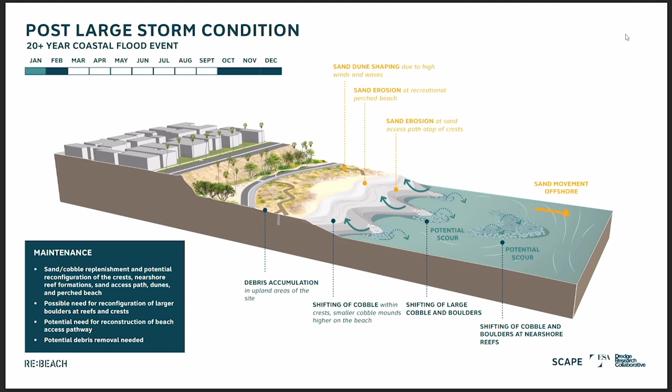So a question you're probably wondering—after such an event, it would return to that summer condition following repair and maintenance. But the question you're probably wondering is, what does this cost?

We feel this is a buildable pilot with modest costs, and I'm going to present the costs broken out by two components: the hybrid beach and the dune park, as well as the construction and maintenance costs.

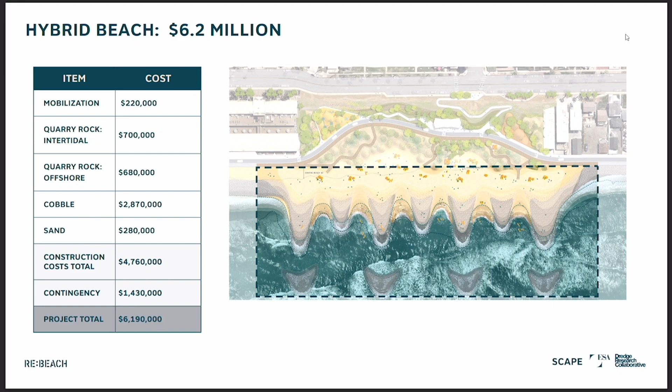We estimate the cost for the hybrid beach to be around $6.2 million. That incorporates the supply and placement of the different materials—the sand, the cobble, the rock—as well as mobilization fees, and a 30% contingency, which we feel is appropriate for this early level of conceptual design.

The dune park comes in at around $13.6 million, and this includes all of the work, including the relocation of the strand, as well as the reconstruction of the park and its various elements that Jenna described. You could reduce this cost by not including all of those elements, but we believe this really brings all of the amenities.

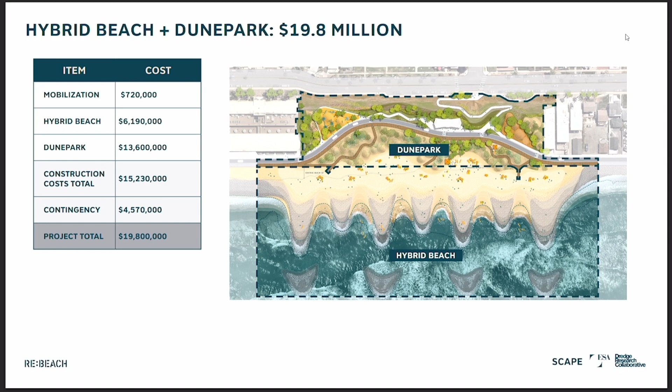You could also do the hybrid beach alone, but together the layered combination of the hybrid beach with the dune park creates a wider beach, a more resilient landscape with dunes, a safer strand, and all the amenities that space and park bring. It comes in at under $20 million, which is below the target price of the pilot.

When we think about maintenance, the dune park itself will require a maintenance budget, but we don't anticipate that being any higher than the existing maintenance required for the current Tyson Street Park.

For the hybrid beach, normal annual maintenance—the replenishment of small amounts of sand, modest repositioning—we anticipate an annual maintenance cost of around $100,000.

In those less frequent years, that 1-in-20-year event, the more extreme storm involving major repairs and replenishment of material, could reach up to a cost closer to $1 million—here we've ballparked that at $800,000. So that's the maintenance cost range, typically being at that lower end.

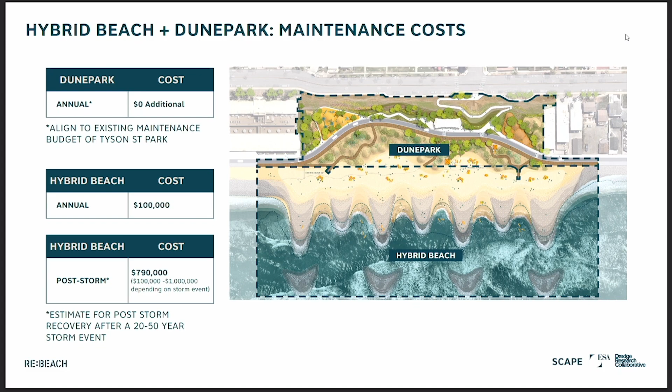What I want to turn to here is the idea of a pilot. This is not meant to be the end, but rather the beginning of restoring and retaining beaches on Oceanside's shoreline. Based on the success of the pilot and design refinements developed through monitoring and adaptive management, we hope you'll be able to adapt and replicate this strategy to other locations in Oceanside.

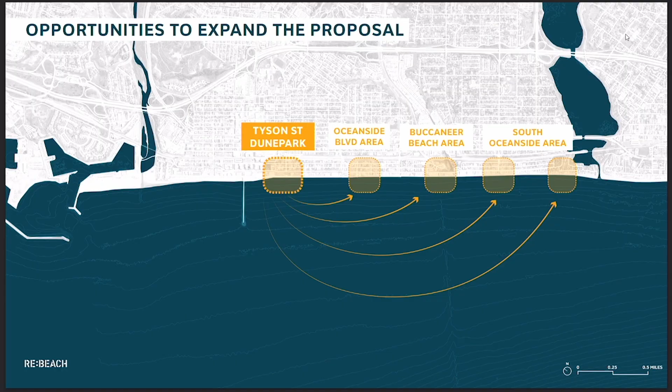Although few other locations provide the opportunity that Tyson Street Park does today to shift the strand back, we think the hybrid beach component—adapting project elements based on lessons learned from the pilot and the specifics of each new site—can be replicated across the Oceanside shoreline using existing beach access points as anchor points. Over time, additional opportunities to realign the strand, create additional dune parks, and even other wider beaches may emerge as we test, adapt, and manage these strategies.

So we look forward to questions. That brings everything to a close.